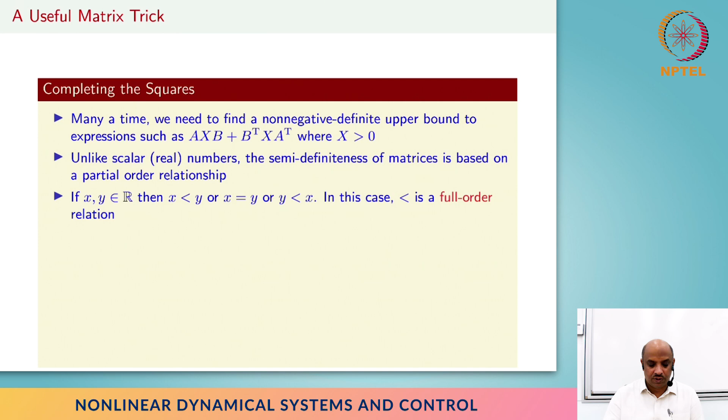Semi-definiteness is a partial order relationship. What I mean is, if you have two numbers on the real line, we know that one of these is true: x is less than y, or x is equal to y, or y is less than x. It's called a full order relationship, whereas in the case of matrices, that's not the case. You can have any of these conditions not satisfied, and B minus A in general need not be anything in terms of semi-definiteness. So such a relationship is called partial order, and that makes things a little bit more complex, not necessarily impossible.

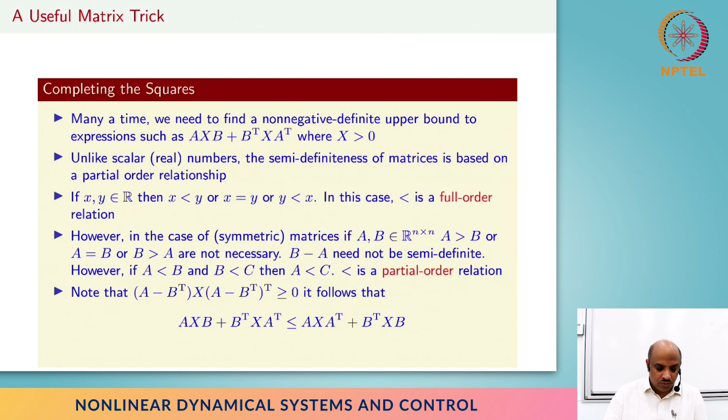So if we look at this particular expression, (A minus B transpose) times X in the middle, times (A minus B transpose) transpose, greater than or equal to 0 - that's like, in the scalar case, squaring and being greater than or equal to 0. Here X is positive definite, so you're multiplying something times a positive definite matrix times something, and we are saying it's going to be greater than or equal to 0. So it's like AX squared is greater than or equal to 0.

So if we expand this, we immediately get AXB plus B transpose X A transpose is less than or equal to AXA transpose plus B transpose XB. What we have to notice is the term on the left is what we typically have to deal with, and that's an indefinite expression. But we can take that and put an upper bound on it, which is clearly a nice non-negative definite expression. This non-negative definite expression is quite useful in what we're going to see next.

Just as a remark, this is the same thing as if you take the expression 2ab in scalars - we know that it's always less than or equal to a squared plus b squared, and essentially this is the matrix generalization of that.

It's called completing the squares, which has a name and things like that. It is quite a trivial observation that we can always complete the squares this way, but it's a very useful thing. In many places we can blindly use this expression, and by just taking different a, x, b and things like that, we keep getting many different upper bounds.

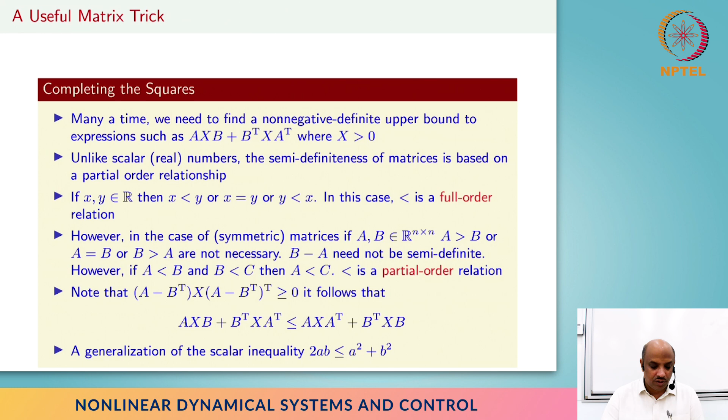So let's jump right in. Basically we have this x dot equals A plus delta A, and here I'm not even going back to this B delta C kind of thing, but I'm a little bit more general.

Somehow I know to find an expression or a function on this set of positive definite matrices omega of p, and I know that for this particular set of uncertainties, this omega of p is an upper bound in the sense of this partial order relationship of semi-definiteness: delta A transpose p plus p delta A is less than or equal to omega p.

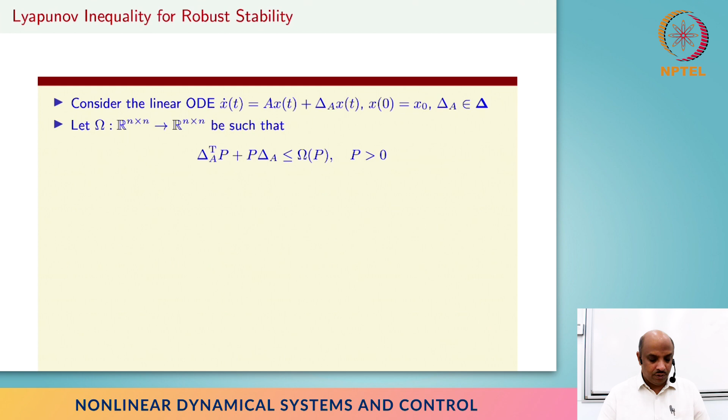For now, let's not worry too much about how I know that. Somehow I know, right? In this particular case, all I can conclude is if there exists a p greater than 0 such that A transpose p plus pa plus omega p is less than 0, then the uncertain system is asymptotically stable for all delta belonging to this set delta. Sorry, this should have been delta sub A.

So what this result is doing is, if I didn't have delta A, if I had no uncertainty, then essentially the stability condition, by now we know, is simply checking for some positive definite matrix so that A transpose P plus PA is less than 0. That's the standard matrix inequality, or Lyapunov inequality, that we are familiar with.

But if we want robust stability for a bunch of uncertainties belonging to this set, how do we ensure it? We obviously need to be a little bit more careful, and the condition has to be conservative, and that conservative condition is going to come from this omega p, which is an upper bound. Somehow it is going to bound this delta A part and then produces this, right?

So in that sense, it's a very general result, and the result is straightforward by looking at V of x equal to x transpose px, and this is what I mean by the Lyapunov function approach to robust stability. It's a fairly straightforward application of the Lyapunov function theorem to this linear uncertain system.

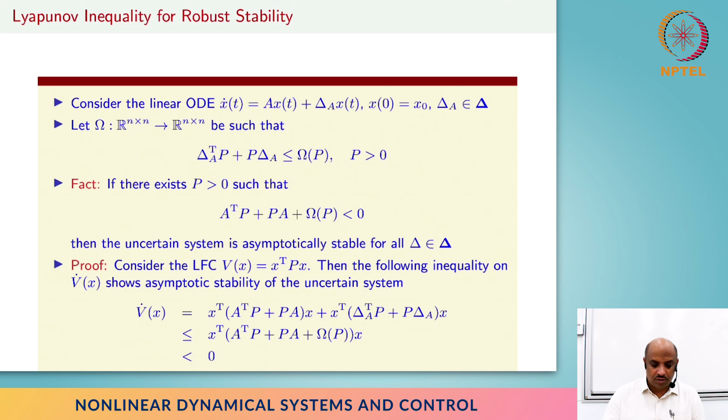But of course, if we don't understand where this omega of p is coming from, then all of this is useless. So we will look at a bunch of different scenarios.

The first scenario, case 1, is where we have delta A as a summation of some perturbation delta I times AI, where AI is known. But what do we know about these delta I's? Delta I's are the set of all delta I's belonging to some kind of ellipsoid. That's what we know about this delta I. I could have very well scaled AI so that this becomes a sphere, but sometimes it may be easier to have this more general ellipsoidal type result.

So in this particular case, for this particular type of set, we could pick omega of p to be this complicated looking expression, and I'll show you the proof of that in a second.

Is this the only omega p that satisfies delta A transpose p plus p delta A less than or equal to omega p? Definitely not. Some may be worse, in the sense that they are even bigger than the guaranteed omega p. Some may be indefinite. You can compare the two, so you may have omega 1 p and omega 2 p, and one is not necessarily always better than the other, so we have to use both of them.

So it's not an easy thing to come up with omega p always, but using our trick of completing the squares, we can always find some omega p, and some of them are better than others. Anyway, the proof goes something like this.

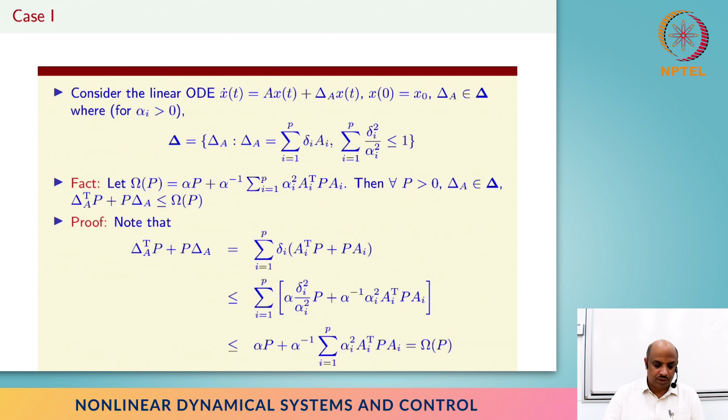So what's nice about this particular omega p is that we have this uncertain system, and we put in this omega p, which happens to be linear in p, so we can check this as a feasibility problem in linear matrix inequalities. Essentially, the stability problem boils down to checking this expanded version of the Lyapunov equation with this additional term omega of p, but it's still linear, so it's relatively simple and straightforward from a computational perspective.

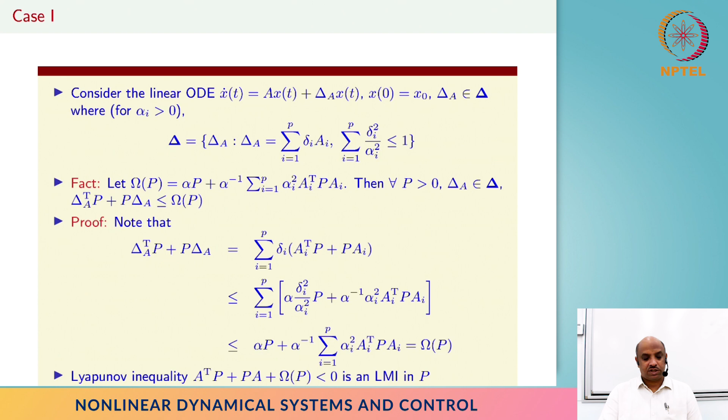So this is case number 1. Now case number 2 is basically where we go back to this B delta C kind of thing, where delta transpose delta is less than or equal to some non-negative definite matrix N. I could have very well chosen that to be identity, giving back our bounded real lemma.

So, for this particular result, this omega p is going to be alpha times p bb transpose p plus alpha inverse c transpose n c, and these alphas provide slightly more variety. The proof is again very straightforward, applying this completing squares trick.

Unlike the previous result, in this case omega p happens to be quadratic, so you end up with a transpose p plus pa plus omega p less than 0 as a quadratic matrix inequality. In that sense we lost a little bit - the simple linear matrix inequality for checking stability has become more complex by introducing this quadratic term, but we'll figure out a solution soon enough.

So let's go to case 3, and case 3 is kind of quite generalized, combining like in the positive and bounded real case - this is the generalized positive real condition, so to speak.

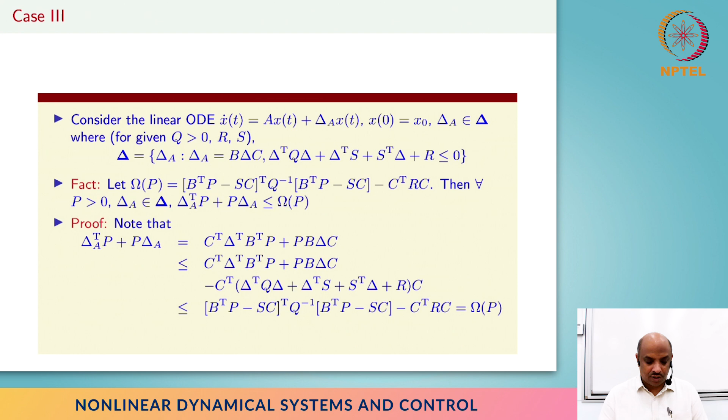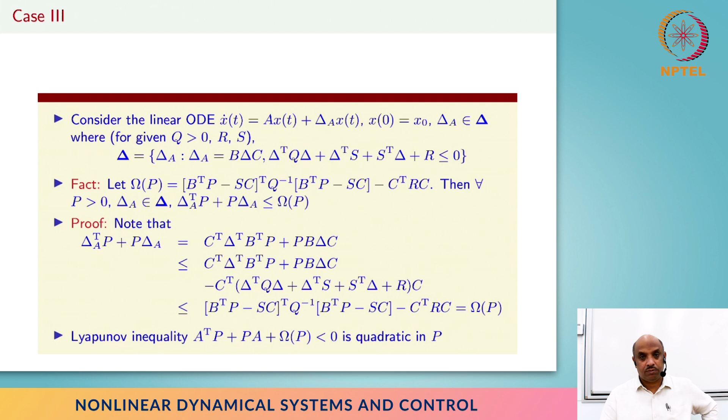We can actually show that the omega of p is again a quadratic expression in p, and it looks quite complex because of the generality, but beyond that, if you understand the simple case of the first case, it's fairly easy to do. In every one of these things, basically we essentially use the completing squares trick - that's why I presented that trick separately, and every time it works like a charm, and we get this omega of p. So again, the observation is we ended up with a stability condition that's quadratic in p.

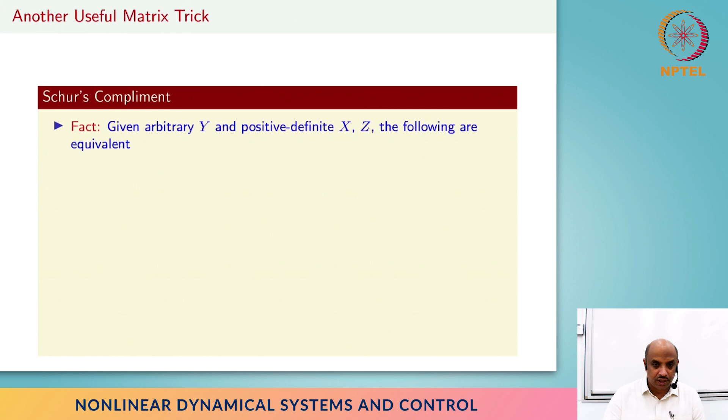While the first result provides a linear matrix inequality, a fairly straightforward thing, quadratic matrix inequalities on the other hand are tricky if we want to keep them as quadratic. But luckily there is again a mathematical trick that transforms every quadratic matrix inequality into a linear matrix inequality. Easier said than done in certain cases, but it always works, and that depends on something quite powerful called Schur's complement. Let's state that result.

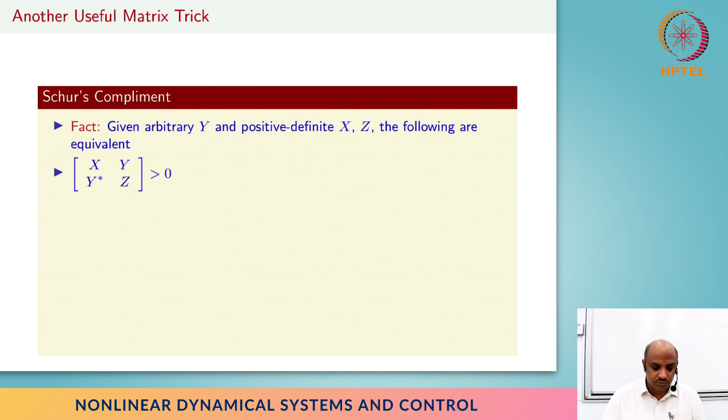Let y be some arbitrary matrix, and x and z are positive definite, and the sizes are commensurate with one another, so that this entire block matrix makes sense.

I'm saying basically the three expressions are equivalent to one another. The first one is positive definiteness of this block matrix x y y star z, which is the same thing as looking at x minus y times z inverse y star. So look at the pattern here: I take the x, which is the top left corner, then go towards x minus y times z inverse, and then get back to y star - that has to be positive, and z positive.

So these two conditions put together is equivalent to this one condition we have there, which is trivial to observe - that the third condition, z minus y star x inverse y greater than 0, and x positive. It's a very powerful result, and it would be a pity if we don't know how to show it, because the triviality of the proof is actually what is attractive, though the result itself is quite powerful.

So the result basically boils down to writing this x y y star z as a product of something in the middle, which is essentially the two inequalities we have in diagonal blocks, and a matrix multiplying and its transpose on the other side. If this is positive definite, we can know that this is positive definite because what we are multiplying on either side of it, they are invertible.

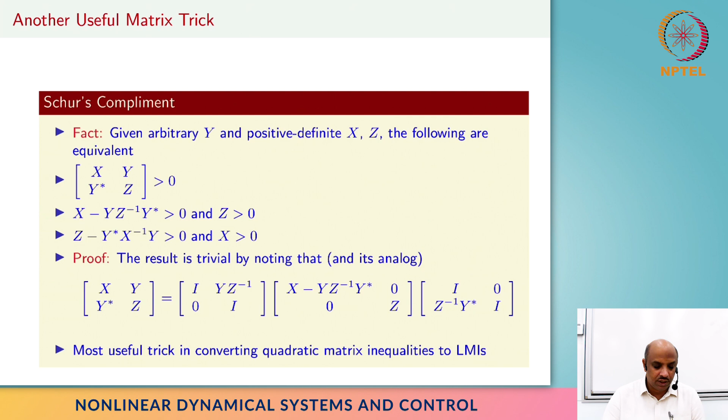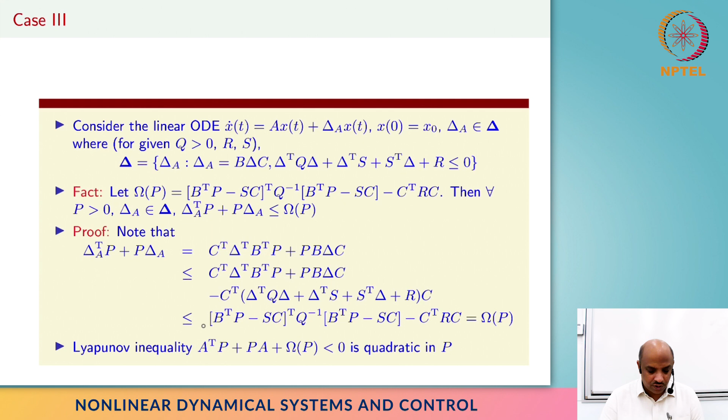So we will take this case 3, which had this very - let's go back and see the result there - we had this very difficult omega p, which is a complicated looking quadratic inequality, and by using this Schur complement trick, essentially it boils down to an LMI.

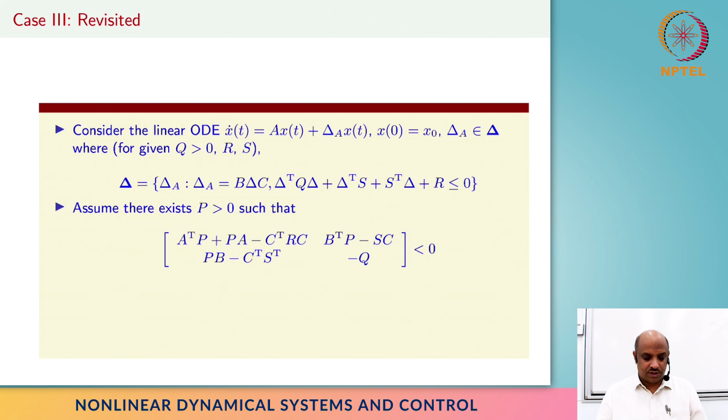So A transpose P plus PA minus C transpose RC, and this B transpose P minus SC, and so on, and you get minus Q and things like that. Now, when we actually convert it from quadratic to this linear form, the dimension has increased. It's no longer n by n, but probably double that size, depending on the size of Q.

But it becomes linear in P, but also linear in Q, R, S. So anyway, the fact is, by checking this linear matrix inequality, we can check for robust stability. Using this Schur complement trick, we can write this quadratic LMI in terms of an LMI. The nice thing about this particular LMI is it's not only linear in P, but also linear in Q, R, S.

And that provides flexibility. Sometimes, in the scaled small gain theorem, we are looking for scaled matrices, and that can be useful in having linearity in those scales.

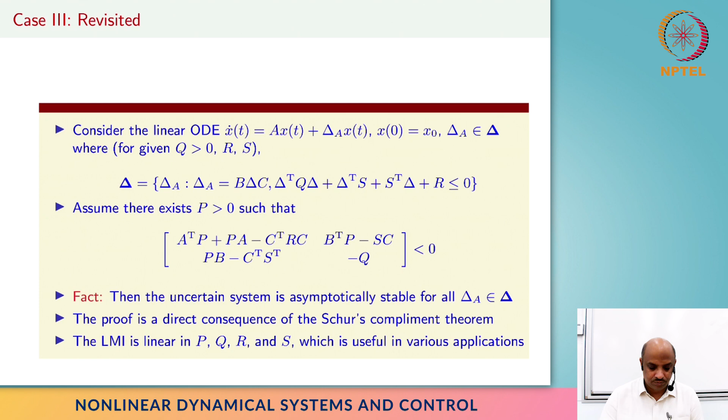Okay, so how do we extend this? I'll just show you a glimpse of how this extends to nonlinear systems. Again, I'm repeating myself that we are showing linear systems because of historical context, but much more if we understand the linear side of things. The nonlinear side of things is relatively straightforward, though specific examples can be very difficult.

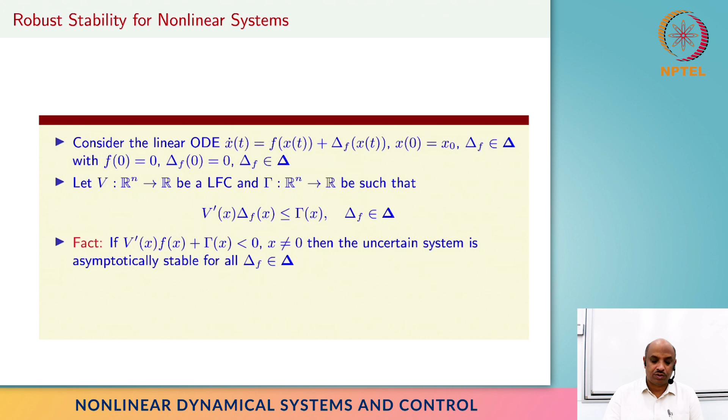So in that sense, it's a trivial consequence of the standard Lyapunov direct method, but by knowing the linear robust stability analysis methods, we can actually state this particular result.

Now, when we look at it carefully, this f of x plus delta f -- unlike the linear case, where we typically assume it's a constant matrix -- in the nonlinear case, we can directly think of it as a nonlinearity. Sometimes it could be a linear matrix times x. It could be both, so it can actually include parametric uncertainty and also unmodeled nonlinearity.

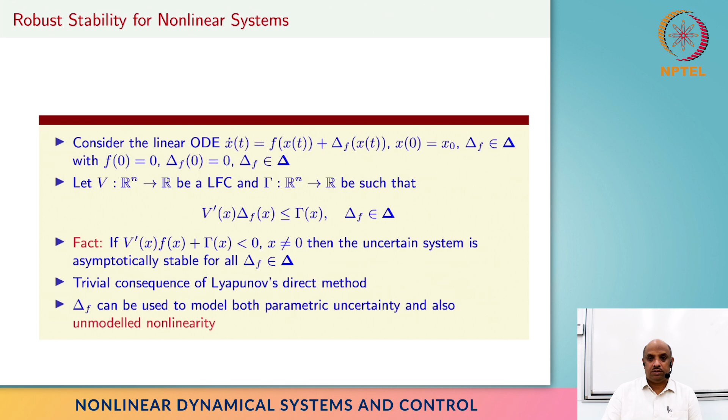And the problem of looking at unmodeled nonlinearities is essentially the problem of absolute stability, which we will cover next. But let me make a few observations before going to the next lecture.

Frequency domain conditions apply to linear systems, as we know, but in general they actually allow dynamic uncertainties, and we will think about dynamic uncertainties at a later stage and consolidate all this information. However, the approach is computationally intensive and incomplete, in the sense that not all frequencies can be checked, and that poses an issue.

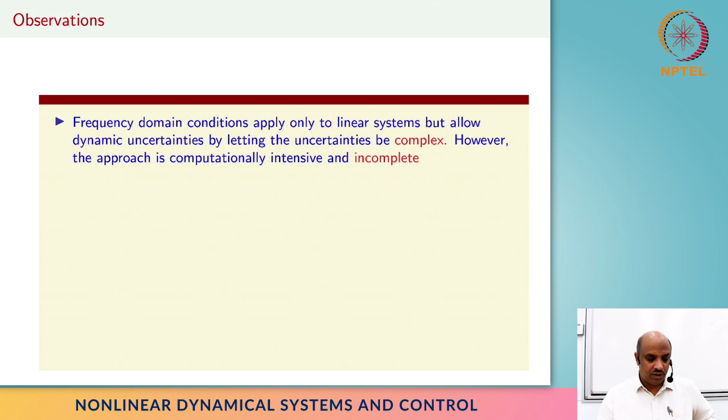Then we figured out that for every one of these frequency domain conditions, we can use the KYP -- Kalman-Yakubovich-Popov -- lemma, or its extensions, to provide a nice linear matrix inequality condition in the time domain. It's a fantastic transition from a very difficult condition in the frequency domain to a linear matrix inequality in the time domain, which guarantees certain tests.

But of course, by viewing this entire problem purely from the Lyapunov function approach, we can actually solve many of these problems using these quadratic matrix inequalities, which can be translated into linear matrix inequalities.

So the focus in this particular lecture has been typically on constant uncertainties of block structures, and perhaps real parameters and things like that. But in reality, a lot of these things become a special case if you look at a problem called the absolute stability problem, where the uncertainty is a nonlinearity. If you specialize those nonlinearities to linearities, that gives you robust stability. So it's a transition -- I'm trying to increase the complexity in each and every lecture.

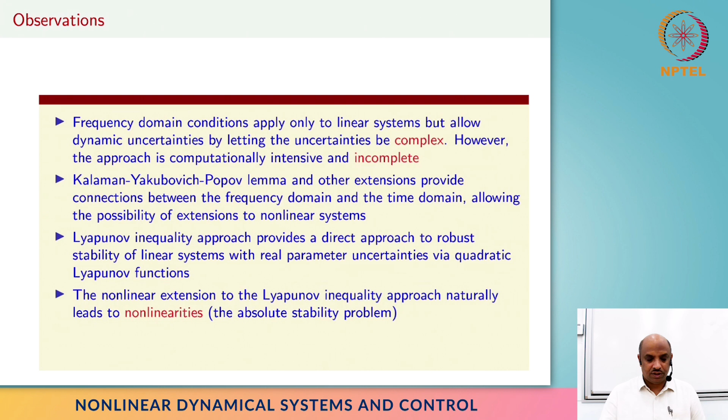The first series of lectures is essentially pure static uncertainty coming from some uncertain parameters and things like that. So the next lecture is going to be on the so-called nonlinearity, or the absolute stability problem, and all these things can be extended to something called dissipativity theory, which is, all in all, a very general problem. Thank you.